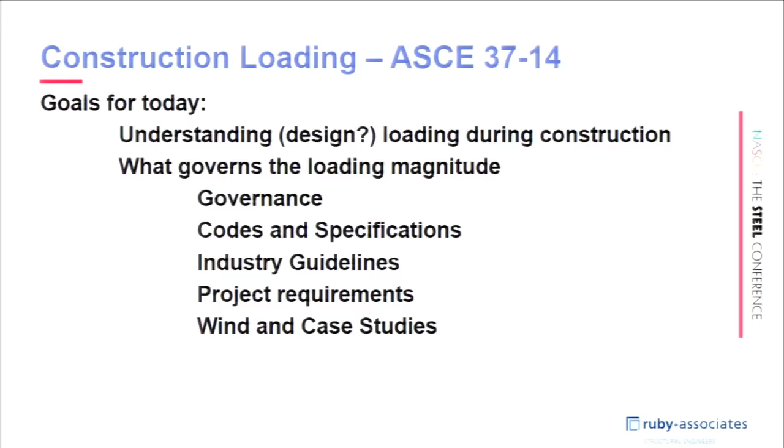We're going to look at what happens when I'm talking about all the other things. Below that document, ASCE 37-14, we have governance. What's governing that? The codes and specs, whatever's put on the drawings, industry guidelines, project requirements, and then we're going to finish up with some wind and case studies with regard to that. All of this has to do with, we've got the book that says these are the loads, but it doesn't know when to apply it, why to apply it, what are the issues.

But a little history. ASCE 37-02 indicates for some configurations, and I think everyone knows this, the loads on a structure during construction may exceed the loads on the finished structure, and hence will govern the design of the structure.

Well, I would need to tell you that in 3714, that paragraph has been deleted. And they talk about members may need to be resized and things may need to be redone, but they don't define and use the word 'will govern the design of the structure.'

I personally believe that that in fact is reasonable, because I think it's unreasonable to assume that a structural engineer, when designing the building, is going to have any clue on what's going to take place in that structure during erection. And the issue gets to that—probably 25, 30, 40% of our work is erection engineering. It's a lot of fun.

The difference being is that when you design a building and you've made your model in whatever GT Strudl or whatever it is, and you push the button and run it, and it comes out and you check and see you got blue and green and the building's fine. But when we build it, one piece at a time, each piece has to be stable, each two pieces have to be stable. So we don't run that model once.

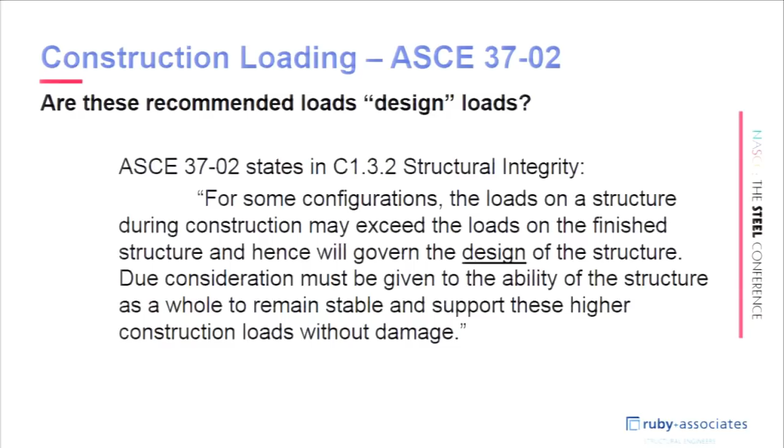So when they stated this from that, 13, let me get the budget here. Okay, did it go to sleep on me? Oh, it's not moving forward. What do I—let me see here. I just did, that came up. Try that? All right, there we are.

Thank you, Jeff. There's always reasons to have the younger generation around.

In many cases, that's that part they talk about integrity that I just gave you, which was in 2. What's in 14? Ah, yes, a little smarter: in many cases, stronger members and connections than originally designed for the permanent structure will have to be provided to support construction loads. Duh, okay?

Yes, so they tightened up between it. But I think the focus when they first did this in 2 was they really were trying to provide the fact that there was design information necessary and there was work necessary. When you do construction loads, there is additional engineering necessary. I think that was their focus.

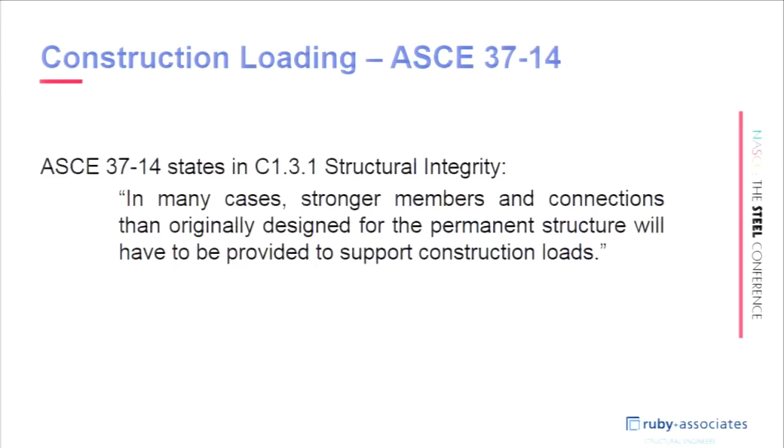But that paragraph was written, 'in the design of the structure'—boom, that's it. The attorneys probably were all over that puppy.

So what we're going to try to do is go through these things reasonably smart. You may have questions. By the way, you can interrupt any time. I have no problem with that.

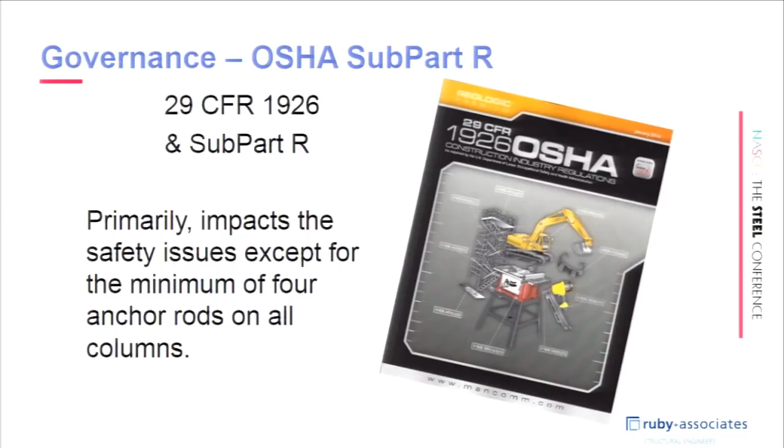We're talking about governance. We were talking about ASCE 37, but governance is about what OSHA tells ironworkers they have to do. One thing is they have to have 4 anchor bolts. Engineers give them 4 anchor bolts. I would suggest they not be in a 6 by 6 pattern, maybe a little smaller outside, but in fact they need 4 anchor bolts. So it primarily impacts that, but it's governance of the erection and how the loads are applied.

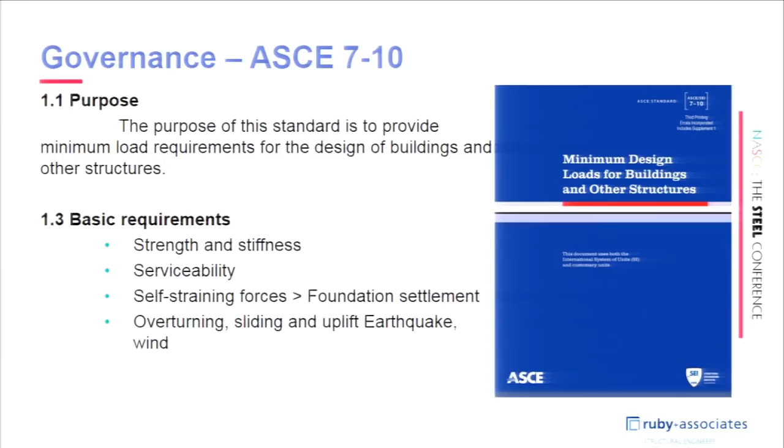We get to the purpose of ASCE 7, which is the design loads that structural engineers use in the design of the structure. You'll see this is the purpose and the basic concept. They're talking about strengths, serviceability, and strains, etc., which are very similar to what we're going to talk about in ASCE 37. The purpose is to provide minimum design requirements for construction of buildings or structures.

We've had some conversation with ASCE 7 concerning this term of design. I think it's the wrong word. I'm not sure what the word should be, but the inference is that it could possibly be code required, although it is not referenced anywhere. Somebody, the owner, could say, why do I have to pay this fabricator so much money to reinforce its structure since you designed it? But on the other hand, if we were building a bridge, that's exactly what would be done. That structure would be designed for a particular erection sequence, not recommended, but one on which it is based.

So today, when we look at a typical 10, 15, or 20-story building, that's not an issue. But when we're looking at an arena or a stadium, or the canopy over the Miami Dolphins Stadium, the erection engineer needs to know everything about that structure in order to build it. In fact, in some cases, those types of structures do have members that are reinforced.

And the question is now, what do you shore? Do you shore? Where do you preload? Do you pre-erect? There's all sorts of things that impact that temporary issue that is not covered in this design loads standard. I'm saying, well, we do it so much, I guess we get used to it.

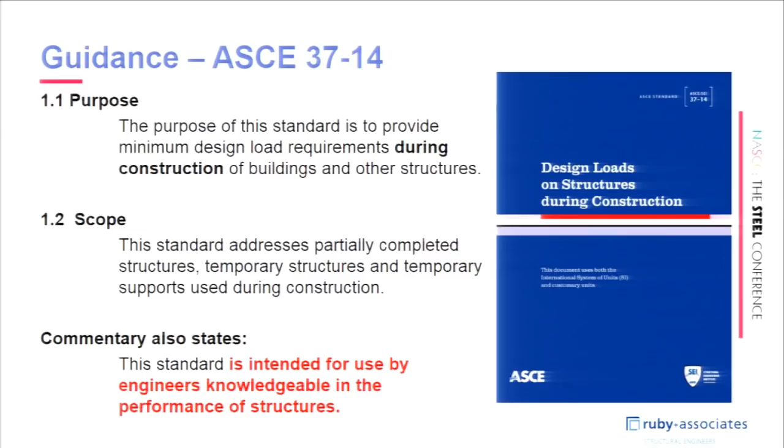Partially completed structures and temporary structures shall possess sufficient integrity under all stages of construction to remain stable and resist loads. Now, I appreciate the fact that that's here, and the reason is this document covers timber, wood, laminated wood, or concrete, precast, all those sorts of things. But if we're talking about structural steel, my feeling is the Code of Standard Practice is much clearer with regard to what's required for stability.

In the commentary, however, this is what they're telling you, intended for the engineer who actually understands structure. It says: sequencing the construction to avoid creating vulnerable, partially completed portions of the structure, and completing the permanent lateral load resisting system as the dependent portions of the structure are erected.

That would be interesting if your lateral load resistance was concrete block, and you couldn't put it in until after the structure was built. I'm not sure how you would do that.

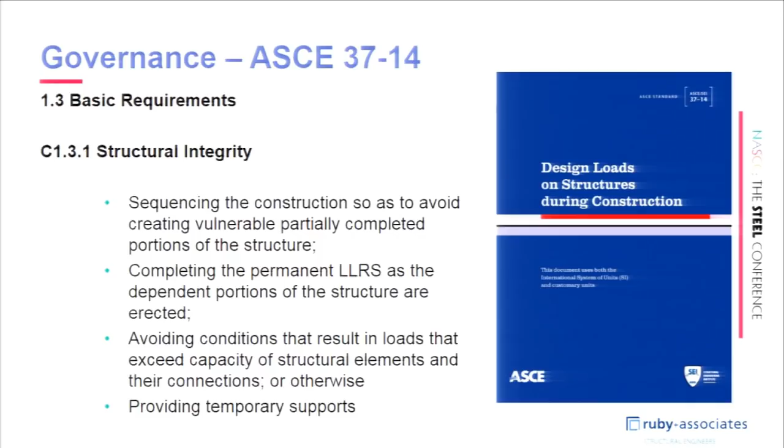Avoiding conditions that result in loads that exceed the capacity of the structural members. I don't fully understand these notes if the document is primarily about design loads, but in many cases stronger members and connections than originally designed will have to be provided to support construction loads.

The one element I have the most conversation with erectors about is that many structures experience higher wind loading on the open structure than on the completed, enclosed structure. I would change the word many to all.

We just completed the erection procedure for the canopy over Sun Life Stadium, now called Hard Rock Stadium, for the Miami Dolphins. It's a canopy supported on cables, completely sheathed top and bottom and covered all around. In the final design, and in the wind load tests, it acts somewhat like a wing. But when you're erecting it, none of that siding is there.

Wind load during erection is possible. We didn't have it, but if we'd designed for the design loads at that point in time, it was 12 times the design load the structure was designed for. We weren't quite in the hurricane zone, so we backed down on several of those elements. But to literally brace that structure for the winds that could possibly happen during construction, there was nothing to brace to that was strong enough to hold it up.

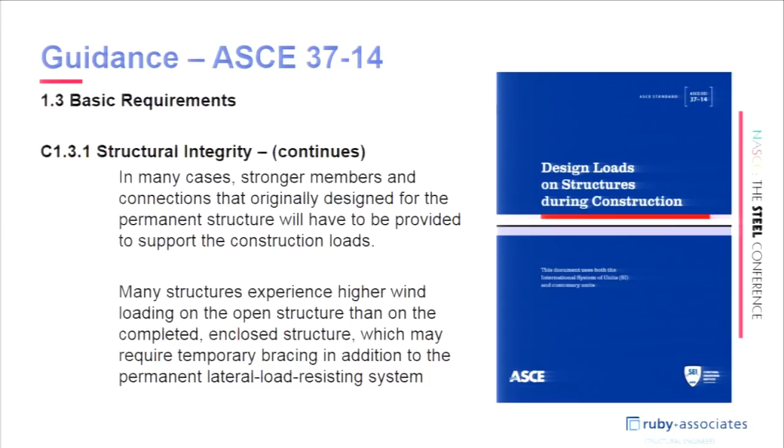So they don't necessarily always apply. On that particular project, we sat down long and hard and talked to the erector about what we were going to do. They did constant monitoring of the temperature and weather 200 to 300 miles away, watching for when the winds were coming, because we had a lot of cranes there with heavy pieces up in the air, and we didn't want anybody injured or damaged. If we had structural damage because of the winds, there was no way to hold it back.

What are the types of loads out of ASCE 37? We have dead load and live load, construction and environmental loads, lateral earth resistant pressures, forces from interaction because of the partial parts of the structure, temporary supports, and effects of loads created by methods and sequencing of construction. But not noted in there is design concept or the unique installation requirements necessary for the structure to be put in place.

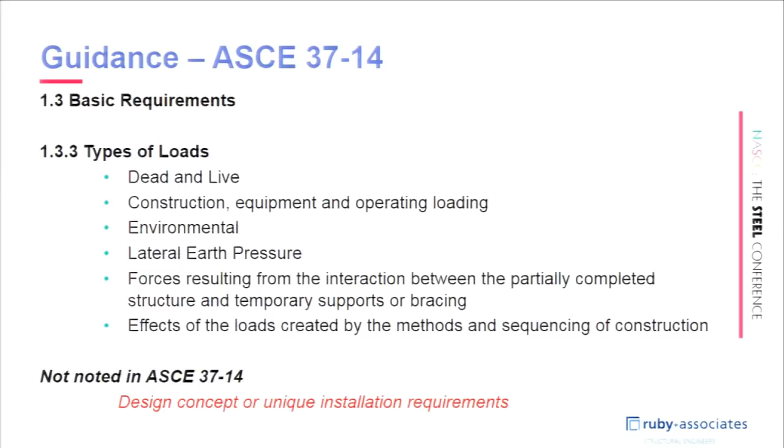Which would in fact temporarily impact your loads, as to whether you have to preload or set things to a certain elevation, one that anticipates that as the dead load is put on it, it comes down to the final elevation, as opposed to setting it at an elevation and letting deflection go where it is. There are times we've had to set a structure above and let it come down as load was put in place.

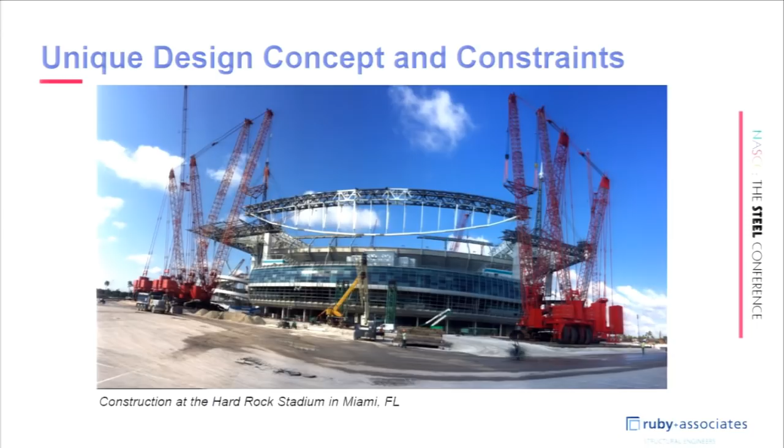So if you want to know how much time you need, when the wind is going to hit, what the loads are going to do, what's happening out there, is it tilting, is the surf up, you need to know all of that before you're prepared to do this.

Codes and specs: we've got the IBC, which references AISC 360. ANSI says maintain stability of the structure at all times. You'll understand that ASCE 37 hasn't introduced anything new when it talks about stability. We've had it there for a long time.

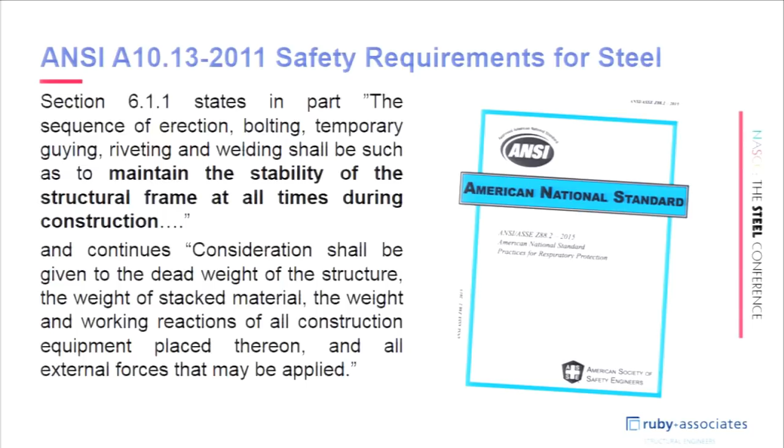Stability in the general stability specifications in the AISC 14th edition: the structural frame shall be carried up true and plumb within the limits of the code of standard practice. As erection progresses, the structure shall be secured to support dead, erection, and other loads anticipated to occur during the period of erection. This becomes an issue with regard to where those loads come from.

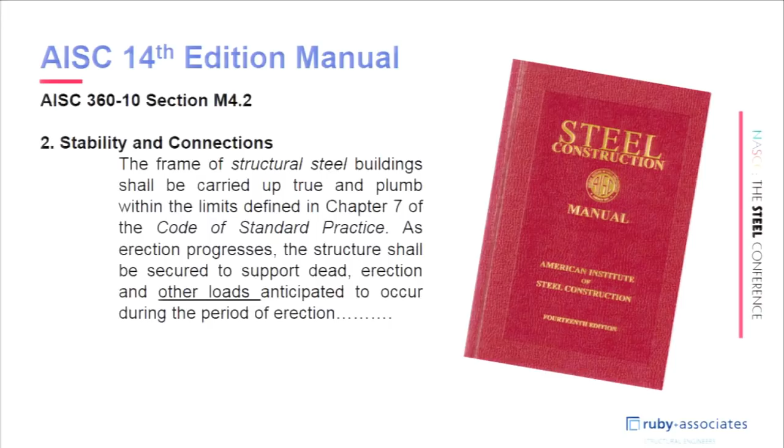When are these loads going to be applied? Are they coming from non-structural steel elements? Are they coming from precast that'll be erected later, or from wall panels that'll be put up in place? How does the erector know what that is? If in fact those sorts of loads will be coming on, they'll need to be told that.

On the Code of Standard Practice Committee, which I've just walked off after about 10 or 12 years, one thing we have in there as a note is that the structural engineer is to define the lateral load resisting system. Why? Not because we want to test whether the structural engineer knows what it is. The focus is that if I'm erecting it, what is the lateral load resisting system, so that as I erect portions or parts of it, I can physically use that as part of my bracing system.

Which means there needs to be a lateral load system with a load path that distributes to the bracing, whether it's moment frames, X bracing, precast panels, poured in place concrete, or masonry walls. Now I've had a couple of structures we've looked at that have fallen down.

The masonry walls, which were the lateral bracing system, were shown on the architectural drawings but not mentioned on the structural at all. It was a church, nice columns around the side, a nice peaked roof going up to a compression ring at the top and a tension ring down at the bottom, and they put that up, but there was nothing where the tension ring was. There were supposed to be shear walls to take the load to the ground.

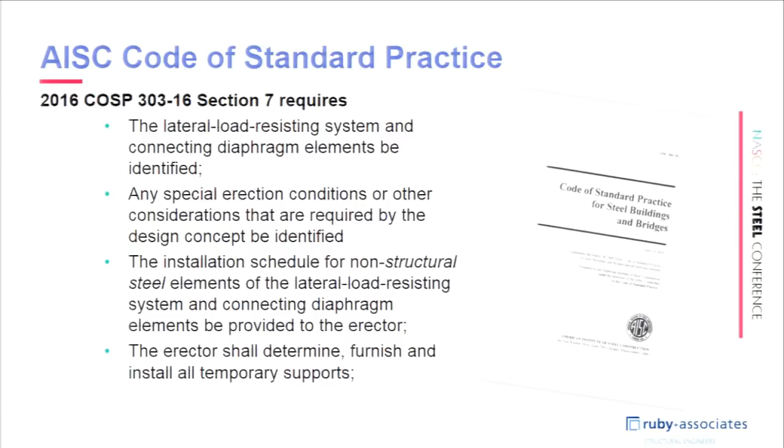The erector does not need to consider any erection condition that results from the performance of the acts of others.

In other words, when you're bidding that job, an erector chuckles because no one ever tells you this, but when you're building the building and let's say the exterior is precast, that's going to be the lateral system, and it will be the lateral system when it's completed. But the first 15 to 25% put up doesn't provide any stability to the building, and it catches a hell of a lot of wind load and becomes a sail, and you have to hold the structure up, and you didn't know anything about this when you bid the job.

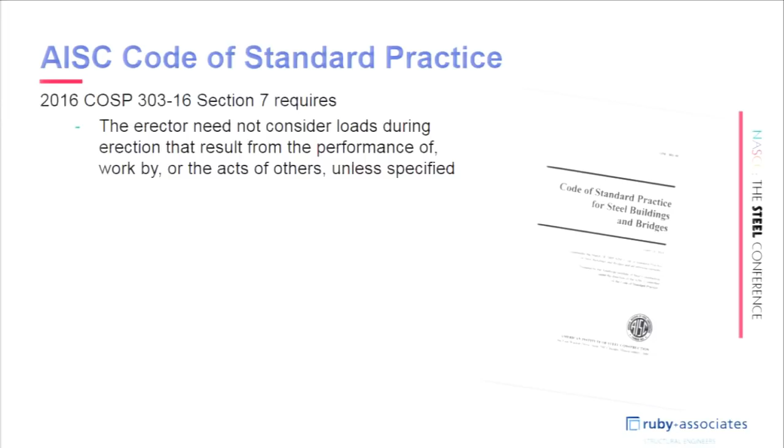So the erector need not consider unpredictable events like hurricanes, tornadoes, earthquakes, explosions, and collisions, but in fact you can be requested to have a hurricane plan. We had a hurricane plan on dolphins. We had a hurricane plan in Puerto Rico. What's the hurricane plan?

Something reasonably that you can work up, be prepared, that you can probably install in maybe a day, maybe two, but you're going to be monitoring the temperature, the winds, the weather, to make sure that that possibility is accounted for.

Temporary supports that are required during the erection of the steel frame, support caused by non-structural elements including cladding, all of that sort of thing. Those are elements that the erector needs to understand what he has to do, because it's a cost to him.

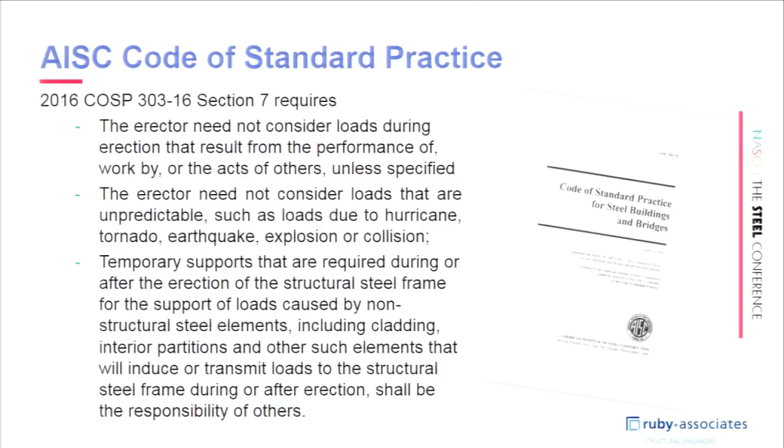And it's a load. Now, this is the AISC design examples, which are really very helpful. The original design base shear for this structure, wind, based on ASCE 7, is 168 kips. If we look at the bare structure, it's 602.

Now, what happens in that 602, that's considering the whole frame is bare. But if I put a layer of deck at the second floor and the third floor, what I do then is I start to provide dead air on those beams. So when the wind goes between the second floor deck and the third floor, it goes under those beams and misses them, flows right through. But when the metal deck is off, it catches every one of those beams.

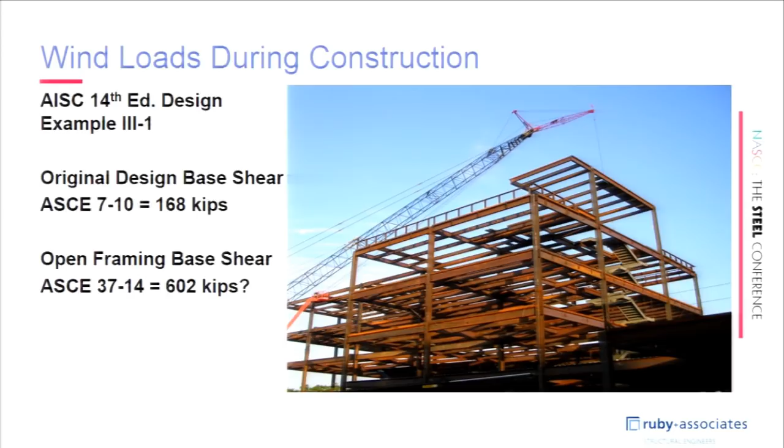And so what happens is the likelihood of us having to brace it for 602 kips. Not reasonable. But to understand it, if you take it by the letter of the way the documents are written, that's what you would have. And that's in that design example.

Structural integrity. Partially completed structures and temporary structures shall possess sufficient stability. We've talked about stability again, but I bring it up because stability is the issue of this whole document. Although it says loads, stability is really the primary concern of this document and why it's generated. They talk about the fact that it's not stable because of winds, but in fact it may not be stable because it does not have a lateral load resisting system, whether temporary or permanent.

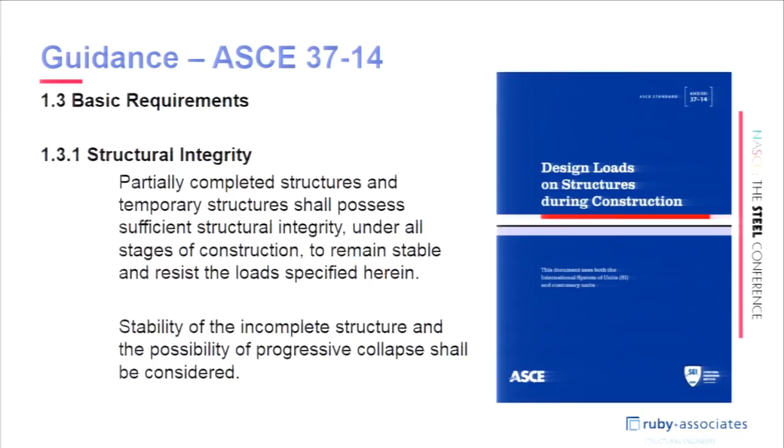Now, we talked about this on planning, etc., and I thought I would go back in the archives. This happened last century. I was with American Bridge when Hancock was built. I spent, I think, 4.5 years on this structure with SOM during the design process.

When we built this and first sat down with the general contractor and the concrete contractor, there was a meeting to decide how this was going to be scheduled, because we had four cranes on this all around the outside. It was more about how many pieces or volumes we could do, since we were shipping it in segments furnished by different fabricating plants. We didn't want the fabricating plants' trucks going to the wrong side—this plant would go north side, this plant would go south side, so it wasn't confusing to them. We sat down and worked out a procedure, and American Bridge generated the procedure for steel: how many floors a week.

And the concrete contractor looked at him and laughed. He said, 'We're going to push your ass off the building.'

Well, how many of you here are associated with ironworkers? Have you ever challenged that ironworker? Did you lose that challenge? Guess what?

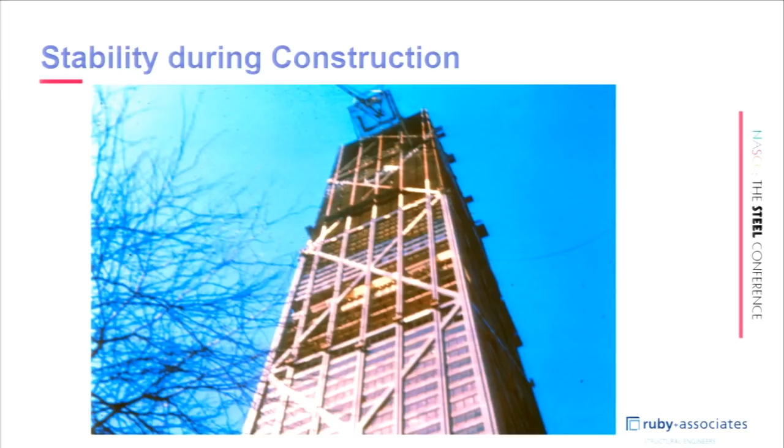AISC supplies a fair amount of guidance. We have the erection bracing on 10, the constructability of structural steel buildings on 23, and stability of steel structures in 28. Those elements are all very helpful with regard to your erection, your temporary bracing, how things would be done, and how you would apply your loads.

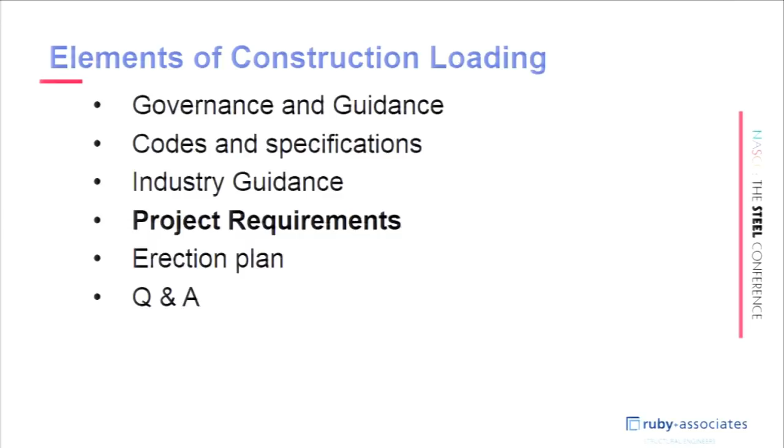Project requirements. Well, what are project requirements? Project specs, general notes, framing schemes, special and unique conditions, elevation or deflection control, shoring, jacking—all of those things in one way or another can impact the magnitude of the load, when it's a load, how it's a load, and how you're going to take it out to the final structure.

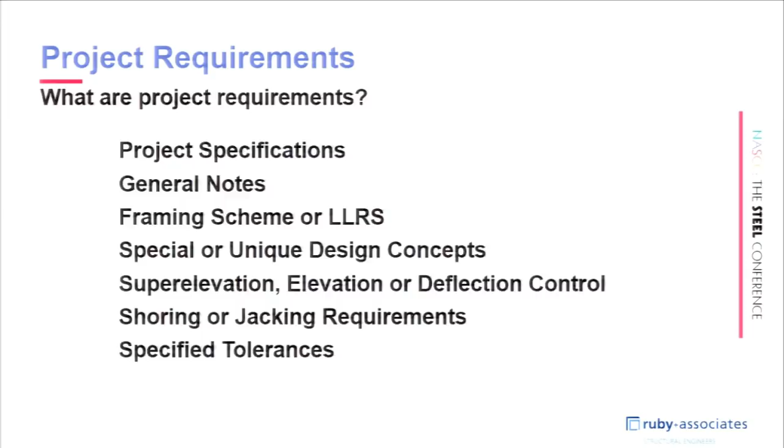One general note like this: the structure is stable only in its completed form. The lateral load system consists of metal deck diaphragms, exterior... it gives you all that information, but not enough data. Even with that information, you don't have enough data to do the project. But that's the general note, right?

The engineer feels he has done his part. He has finished the drawing. The drawings are done—that's his life, that's finished, okay? My feeling to engineers is you shouldn't feel that way. Your drawings are garbage; they'll be good for making fire later. The function here is the completed structure. That's the project. So what you have to do is provide the data to do that, whatever that is—you have to figure a way to provide that, okay?

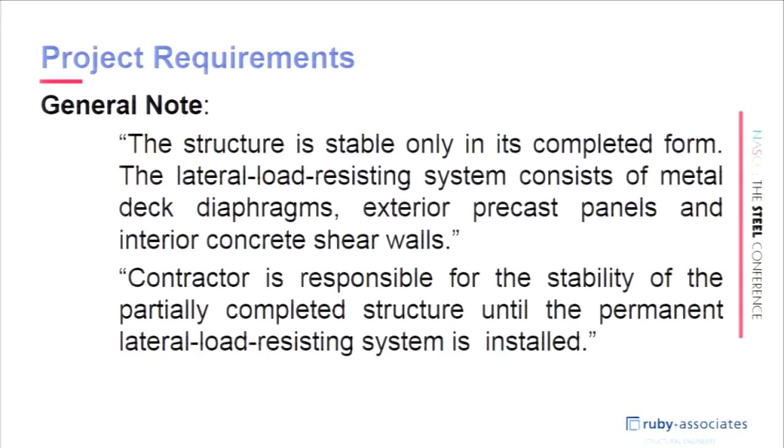The contractor is not the enemy. The fabricator and erector are not the enemy. The question is, if you tell him what he needs, the contractor is responsible for stability—he knows that. But this up here, they're talking about all this stuff: what's the schedule? When is all that stuff going to be in place? How long can I rely on it without...

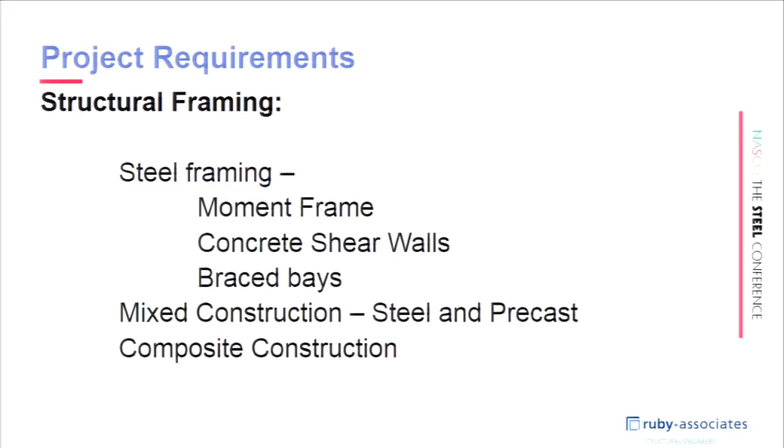Steel framing—I don't have enough room to put down all the different steel. What I'm saying is the type of steel framing there is, how it is, what it is, where it goes, where its availability is, the job site conditions, whether there's access in or out—all of that is going to impact the loading and temporary bracing schemes that you put on the structure. Shoring.

This is in Pittsburgh, the igloo. It's been torn down.

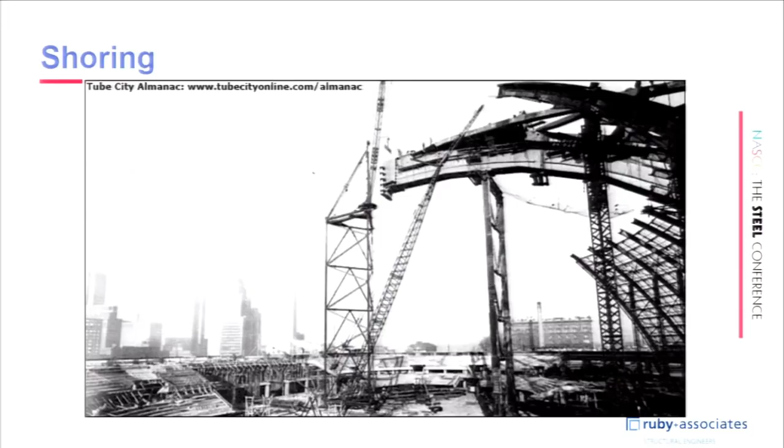That elevation out at that tip had to be maintained, but actually had to be set at an elevation so that as the structure got all the load in place and they could bring the shores down, the movable leaves would be able to be moved without binding. Significant elevation control in that process.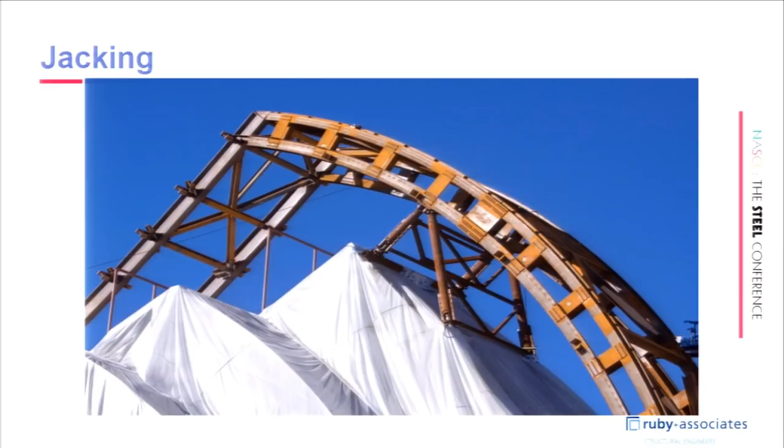Kansas City Performing Arts Center is a structure within a structure. They are outside of each other and had to be separated, but when erecting them, you didn't have stability. You had to use the inner structure to support the outer structure, and we had this jacking frame added in there to be able to get to elevations.

Super elevation. In Chicago, if you've not been there, this is what I usually demonstrate: a wrinkled piece of paper generated to look like stainless steel. But that is supported by 150, 250 tons of framing behind it, with a cantilever like 100 to 125 feet, but the backspan is like 50 to 60 feet. Now, that's not the geometry you would like to see, but that's the geometry that there is.

Now, when they did this particular beautiful thing, they had this done in CATIA, and all of the geometry was there. The engineer had indicated in the specifications that the structural steel support shall be installed and then surveyed, and that survey given to the skin guy so he can manufacture the skin to fit.

Now, the general contractor in his wisdom said, well, I have this model. Why don't I give it to the fabricator and to the skin guy, and they can both do the fabrication to this model, and we'll survey the structure at noon when everybody's at lunch so that we can tell where the structure is.

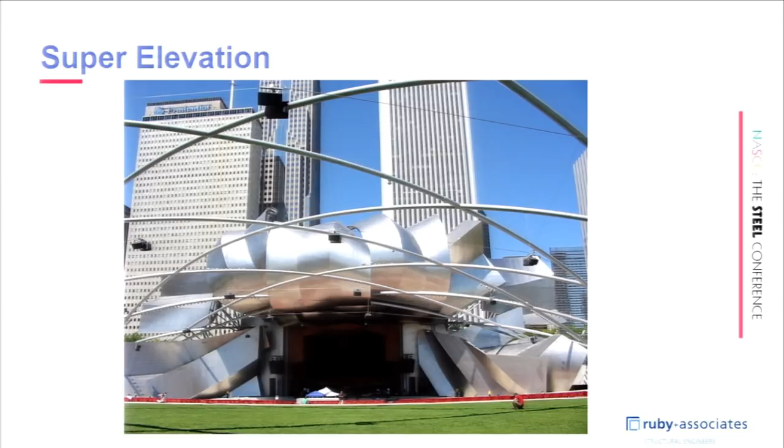This structure here, at noon in Chicago, at 85 and 90 and whatever degree temperatures, we're talking as much as we found in our modeling, 8 to 12 inches of movement of this structure, and they are supposed to be surveying it to determine where the skin's going to fit. How many here believe it fit? They managed to get it in, but it was an issue.

Specified tolerances. The AISC Code of Standard Practice has tolerances in there. They satisfy a 4, 5, 10, 15, 20-story building really well. Beyond that, manufacturing facilities, anything like cantilevered arenas, stadiums, there aren't any.

Now, as they said in one of the presentations earlier today, if a tolerance is not in the AISC code, it does not mean it's zero. It just means it has not been specified.

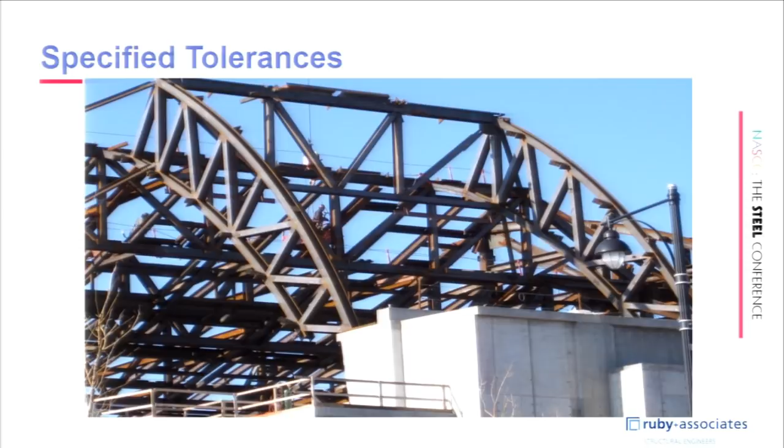But does that impact loading? Absolutely—deflection criteria. Often we'll get involved in scenarios where we have a deflection. We're going to be loading the structure, putting compression on tension members, putting tension on compression members. Some engineers get a little testy about that, a little concerned. How are we doing it?

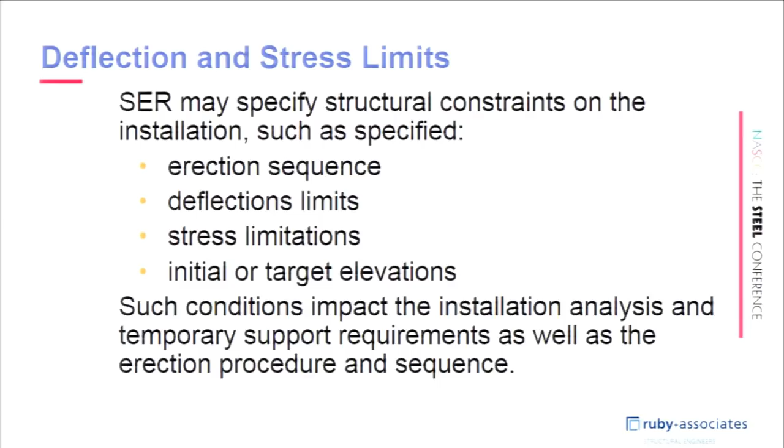The issue is that in most structures, in arenas and stadiums and those sorts of structures, during construction we'll move the dead load around. It will not be, in the end, exactly as the engineer had expected in his modeled structure. That can be an issue, so we need information with regard to erection concerns or elevation concerns, things that need to be done.

So I've talked enough now. I'm out of stories. I'm introducing Jeff, and Jeff can come up and carry the ball.

Do you have a few quick questions before we let Jeff take the ball?

Just very quickly, David, in your early slides, you were expressing concerns about responsibility and lack of clarity. Yes, I should refer everyone to Code of Standard Practice Section 1.8, very specific on the responsibility of the EOR, the structure, and the erector. But Section 1.8 of Code of Standard Practice. Thank you, Mike.

The question was on our slide concerning the base shear of about 160 some, but according to ASCE 37-14, it would be 608. What we're saying is that 608 was based on a bare structure that stayed bare the entire 5, 6, 7, 8 stories. The likelihood of that occurring is slim to none. But if you're the erection engineer, that's something you really want to talk to the erector about, because if you're working for the steel erector but the metal deck installer is somewhere else, there's an issue as to the schedule for that other work coming into place.

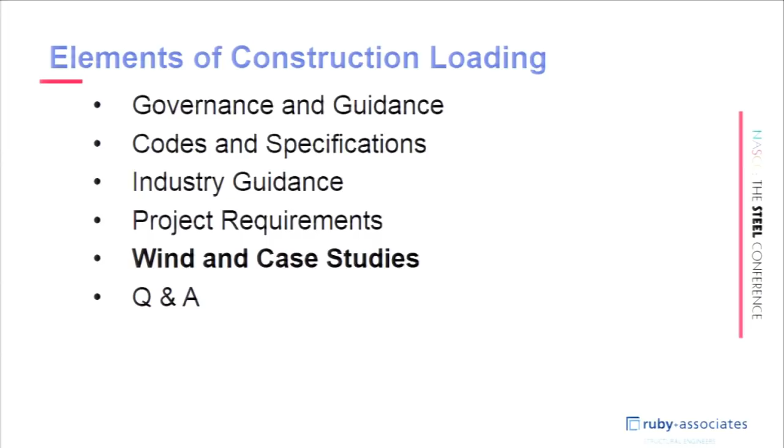Thanks, Dave. So what I'm going to do here is give a brief talk on ASCE 37, how we use it as erection engineers, talk about some of the equations regarding construction period wind development, give you some typical pressures that we find as erection engineers, and then some case studies of a few different design elements.

So first, what does ASCE 37 tell us? It tells us if you want to develop wind, go back to ASCE 7. Here we've got our force equation: force is equal to pressure times area. We've got a couple other extra variables—the gust effect factor is typically 0.85 when we're doing erection engineering on structural steel jobs.

Our force coefficient, which is a function of the area of steel to the gross whole—that factor can be anywhere from 1.6 to 2, but more often than not, as erection engineers in our office, we find it's 1.8. G and C sub F typically stay at 0.85 and 1.8, then you have the area of steel—as Dave mentioned, that's all projected surfaces of structural steel, normal to the wind, and can be quite substantial.

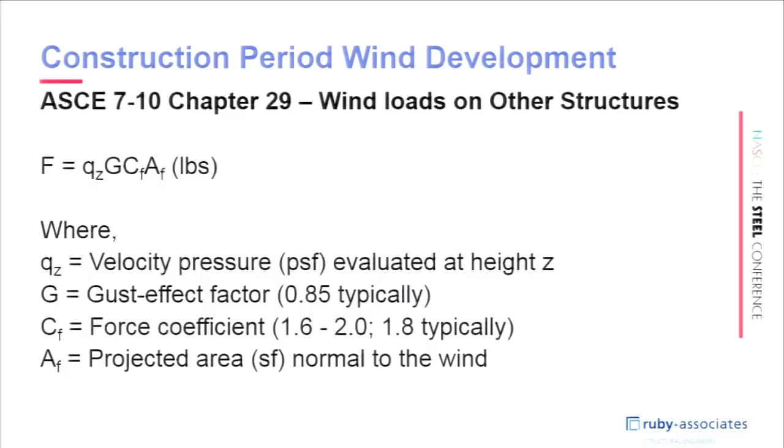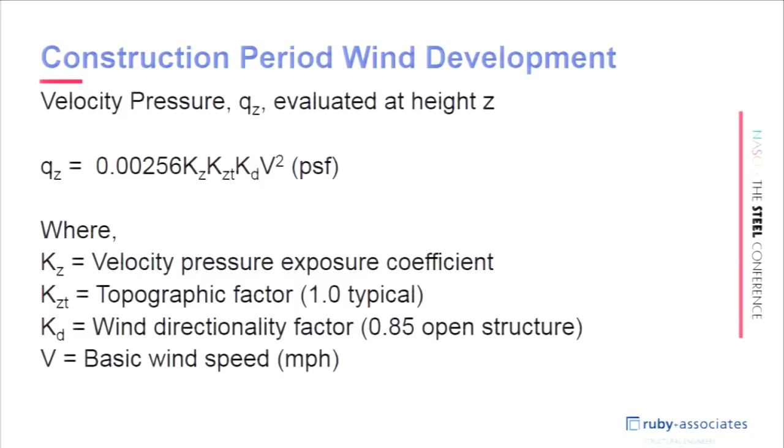As we investigate the pressure a bit more, we have this equation: 0.00256, a couple different K factors, and then V, the base velocity of wind. The big takeaway is that value is squared. If we're talking about a 10-mile-an-hour wind on a job site versus a 100-mile-an-hour wind, that's not 10 times the amount of wind—that's 100 times the amount. So that pressure exponentially gets quite large.

So again, with ASCE 7, here's the wind maps. What ASCE 37 tells us is during erection, we can use the risk category 2 maps. These maps had changed in 2010. They're now given as LRFD, which means they're load factored.

So if everybody that's been around for more than the last 6-7 years used the old maps, these were 90-mile-an-hour wind zones, the primary focus of the country. And then as you get out of the coast, those wind speeds go up and up. So that 115 is an LRFD load.

What we do in order to communicate with our clients is we convert that back to ASD. It's on our drawings, we're trying to communicate with real world wind speeds. The anemometer at the top of the crane boom does not measure with a load factor to get you to LRFD. It's talking real world wind speeds.

So we convert that. The last thing we want to take away from this slide, as Dave talked about, is ASCE 37 hurricane provisions. There's about a 4-month period where we're outside of hurricane season along the coast. With ASCE 37, we're allowed to take that base velocity and use the 115. So again, convert it back to ASD, but for that 4-month period, erection engineers, we can use that lower 115 miles an hour as our baseline.

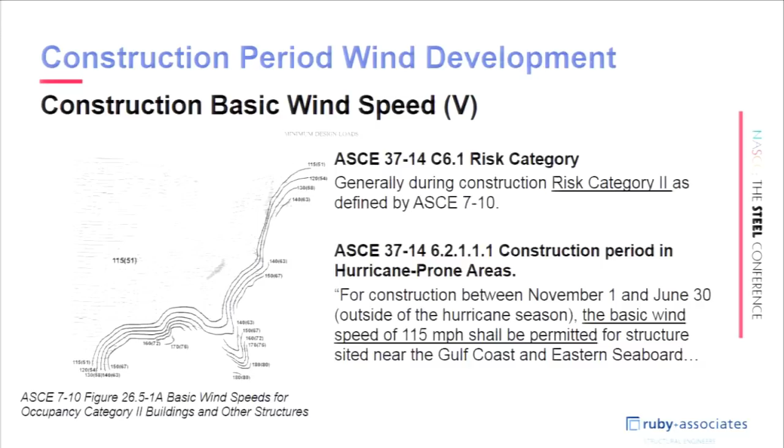For the 8 months that we are in hurricane season, you have to have that contingency plan. Taking Miami for instance, which is LRFD again 180 miles an hour, that pressure could be 200 times the amount of temporary bracing that you're going to be required when you're making that plan. So just as a heads up, it's better to build when you're off season.

Dave talked about really what did ASCE 37, what are its takeaways, where did it all come from, where's its basis. The biggest thing that we as erection engineers use ASCE 37 for is this handy little reduction factor. What this reduction factor is talking about is based on the duration of the project, you don't have the same probability that those design winds will be on your structure because of the duration of the project. It's just a function of probability of the wind hitting.

So in our office, we find that most structural jobs that we do, I'd say 99 out of 100, probably 100 out of 100, fall in the 6-week to 1 year range. So ASCE 37 has given us a break of 0.8 on that base wind.

So at the bottom of the screen here, what we have is just talking about the base velocity. So we take the new map, 115, which is LRFD strength. We convert it by dividing by 1.26, which is a value that ASCE 37 gives us. And now we're back to, it's 92 based on that factor, but we're really back to the old 90-mile-an-hour wind maps. So now during a construction period, for temporary wind loads, we multiply that by that 0.8 reduction factor they gave us, and now we're back to 73.

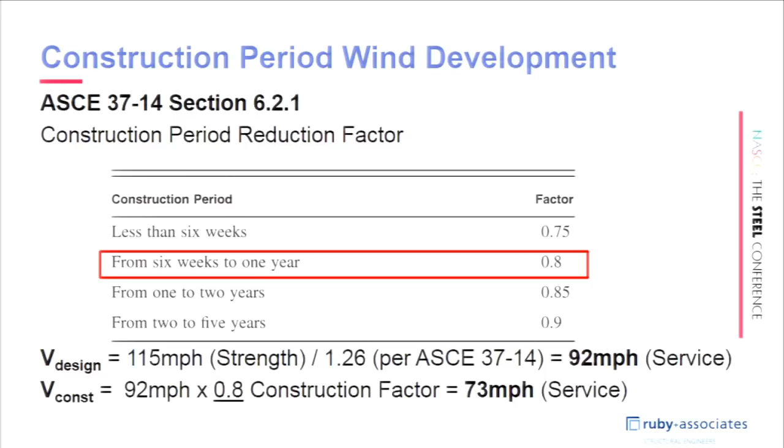So the reason I did this is I wanted to say, as erection engineers, when we're doing work for an erector, generally we're bracing up that structure for 73 miles an hour on most projects, and then providing some factor of safety on top of that.

So what I thought I would do is put this little table together here, and what we're looking at is a couple different heights, so exposure B or exposure C. This is most projects that we run across are in those two exposure categories. But the big takeaway here is seeing just how quickly that pressure goes up.

So what I've done is I've used the equations that we previously ran through, and then just plugged in 6 different velocities, and developed these pressures. You can see just how exponentially quick that pressure builds once you get higher and higher wind speed. So if you have a 15 mile an hour wind out on your job site, that's a relatively windy day.

You might lose your hard hat. At 25 miles an hour you're starting to think about shutting down the crane. At 10 or 15 miles an hour, you're at 1 PSF - that's nothing on your structure. At 30 miles an hour, you're shutting down the crane, and you're still under 5 PSF on your partially erected structure.

So as I mentioned, ASCE 37, we're designing and bracing, analyzing to the 73 miles an hour. Where if we're talking about LRFD or ASD, the full design for the lateral load resisting system of the completed structure, that's up there at 90. So taking a look at 90, we're designing to 20 to 35 PSF - it's a pretty sizable load.

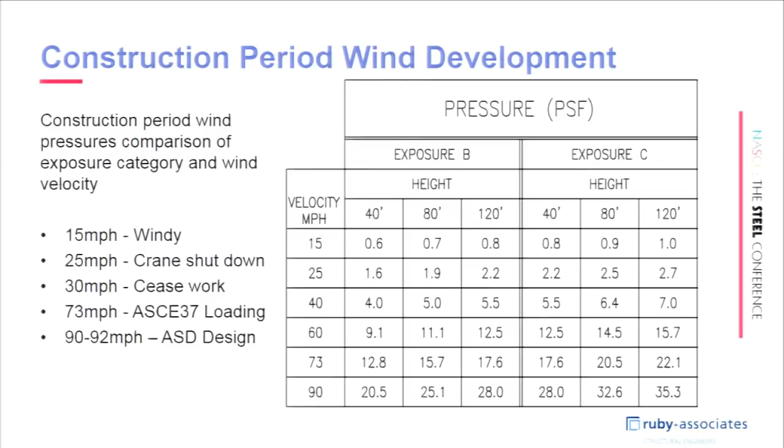So as I was preparing for this, I thought it would be nice to show everybody, just give them an idea of what velocity equates to in pressure. I mean, the table was nice, but you couldn't put your hands around it, you couldn't feel it.

So two weeks ago, across most of the Midwest, we had this nice windstorm that kind of provided an example for me. What you see in the photo here is the outage maps from DTE, our energy provider, and those are all the homes that lost power that day.

It's 60 to 65 mile an hour winds. I've been in the Detroit area now for 20 years, and that's as high as I've seen it. We lost power to nearly 800,000 to 1 million homes, and we had a power outage for roughly a week for a lot of homes - I think we had one guy in our office who just got his power back last Saturday. So it was pretty devastating, but it gave us something to look at.

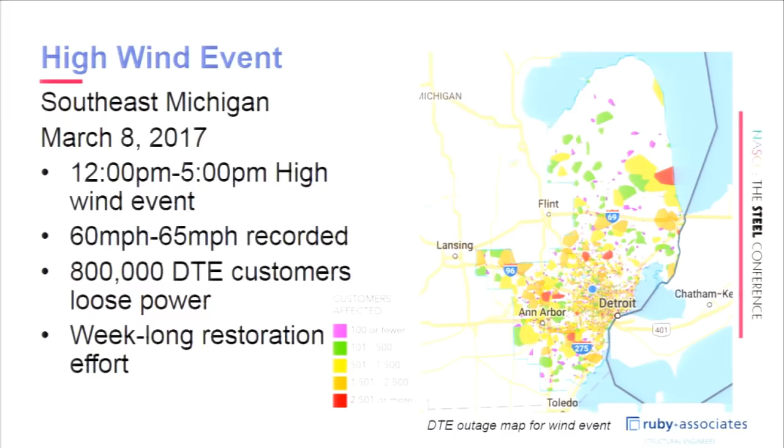So I take that 60, 65 miles an hour, run it back through our same equations, and equate it to a project. I thought about it - all the damage that was occurring was really from trees knocking down power lines, falling on this poor guy's car, tearing off awnings and what have you. But the pressure, whether you're category B or category C, you're still in this 9 to 13 PSF. That's half of what we're designing structures for on the full design. And if we convert that, running it for an erection engineering job off that 73 mile an hour figure, that's about 65% of the design load - really what we're designing or analyzing structures for temporarily.

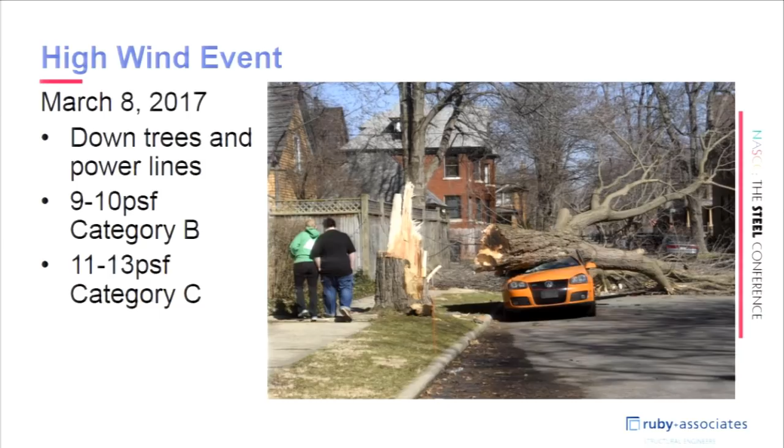So now we've got just a couple of case studies I wanted to show you, just to show how wind can impact some jobs. First we start with this freestanding column. The column's 45 feet tall. We put our wind pressure on it in the 10 to 14 PSF range, exposure category B, and you can see we generate an overturning moment at the base of 15 kip feet.

That's not a lot. But when you look to the bottom right of the screen here, you see the base plate with this 6x6 base plate pattern - it's a 6x6 anchor bolt pattern, sorry - and it's a 22-inch by 22-inch base plate. So it looked a little weird. The anchors are 3/4 inch diameter, A36, and now we're applying the 73 mile an hour wind pressures of 10 to 14 PSF.

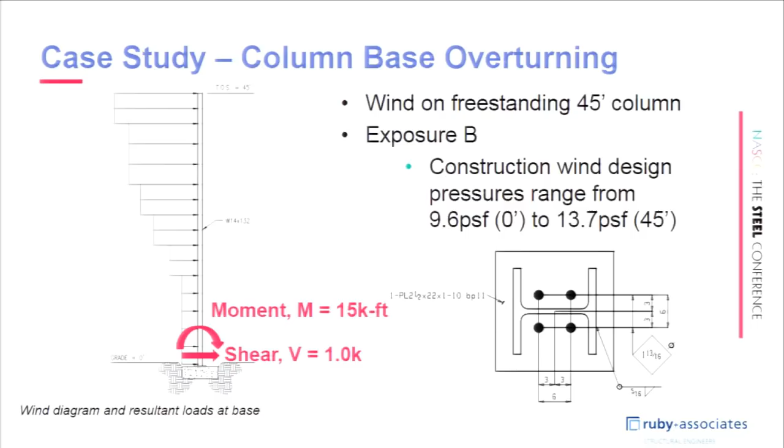So the one thing to note here is the erector wasn't using shims - we're on leveling nuts on that 6x6 pattern with the A36 threaded rod. Needless to say, the anchors don't work for the ASCE 37 wind loads. We're overstressed - we haven't quite failed, but we're getting there.

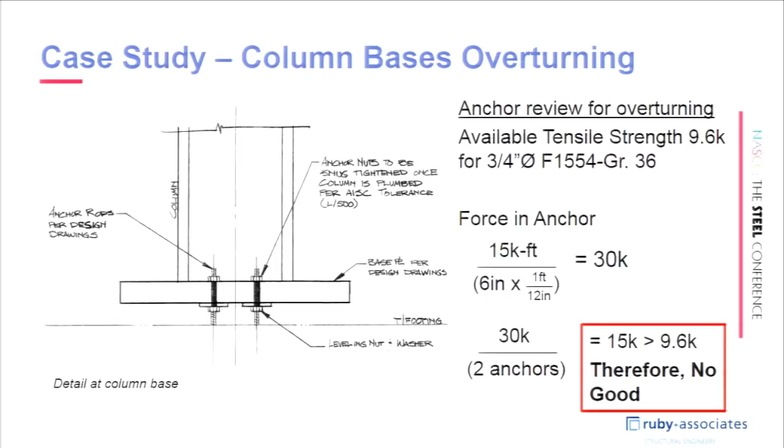Well, this is what it looked like when I got to the job site. That's the column - you can see the great big base plate pattern. Fortunately, or maybe unfortunately depending on how you want to look at it, this did not fall from wind. This column fell due to an incidental load during erection.

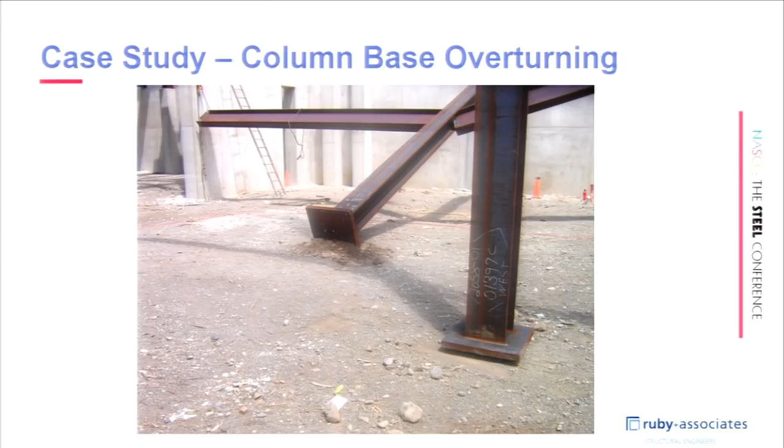So what happened was, during fit up, they were trying to tie in at the top of the column and just trying to force fit a girder into the column. Again, sitting on those leveling nuts, there was hardly any resistance. So what you see there is 3 of the 4 anchors are still at least on the base plate - the other one shot off to God knows where. But you have this tensile rupture.

And when I arrived on the job site, the first thing I asked the guy was, where's the shim packs? You have this 24-inch base plate - you got all these opportunities to throw some shim packs around. Where are they? We didn't think we needed them.

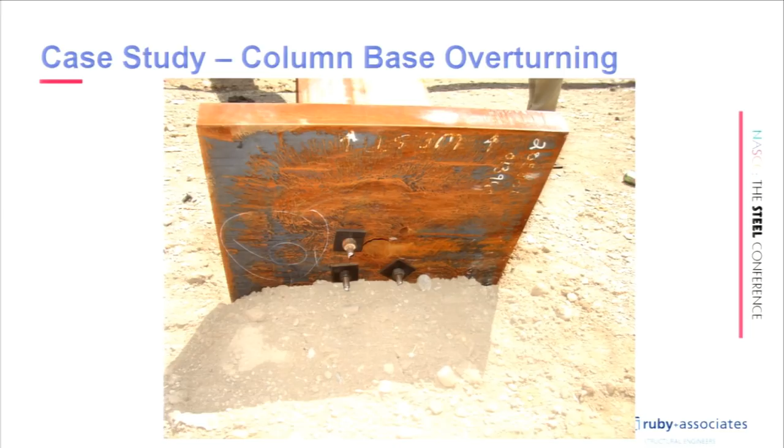So I thought I would just, for the purpose of this presentation, kind of back solve on this 45-foot column. At the time, we were brought in and gave them some erection engineering services to tell them where to put some shims and where to brace, etc. But for this presentation, I thought, well, let's figure out what that 500-pound load at the top of a 45-foot column, what does it do?

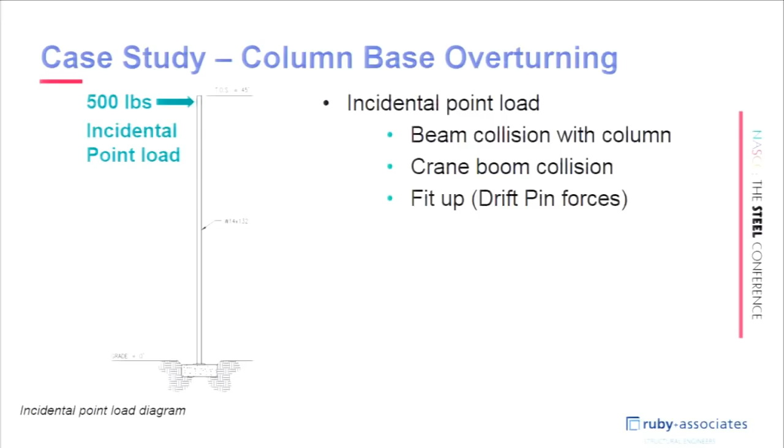So it's an incidental load. It could be a beam off the crane colliding with the column. It could be the boom rubbing up alongside the column, or it could be, and this is probably the biggest one, is just fit up. So if you had a braced frame and you were trying to fit the girder to the adjacent column from a braced frame, the braced frame's not going to go anywhere. But if for whatever reason it's long or tight and you start putting in the drift pin and the iron worker gets out his beater and he starts getting after it, 500 pounds you can get there in a real big hurry. So I think you all know where this is going.

Just 500 pounds would generate a moment of 22 kip feet. These anchors give way at 19, so no bueno.

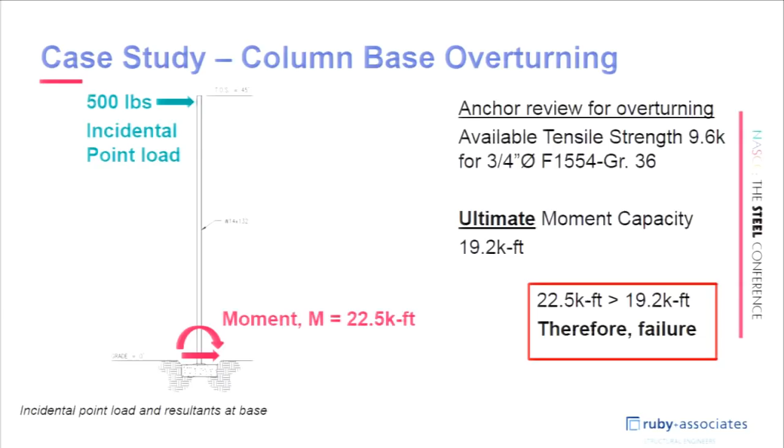Our lessons learned here, for the erection, or for the engineers out in the audience, push out those anchors whenever you can. Take them outside of the profile of the column. It affords a lot of insurances during erection. And if you need a 24-inch by 24-inch base plate for some reason, question yourself as to why you have a 6x6 anchor bolt pattern. If it doesn't look right, it's probably not.

Erectors, leveling nuts are great, but if you think about what they're doing, you can't be putting a dead load on them. You have a nut underneath the base plate that's now taking dead load, so it's as good as those threads that are engaging that anchor bolt. On top of that, you enter any amount of overturning moment into it, it's a recipe for disaster.

So add shims. Very cheap insurance policy. Look out for forecasted winds. If you have a good plan, you shouldn't have to worry about it, but keep an eye out on it. And then just be aware of those incidental forces. If you see guys beating bolts or beating drift pins in place, take a look and make sure you got some shims down there for some way to resolve that moment.

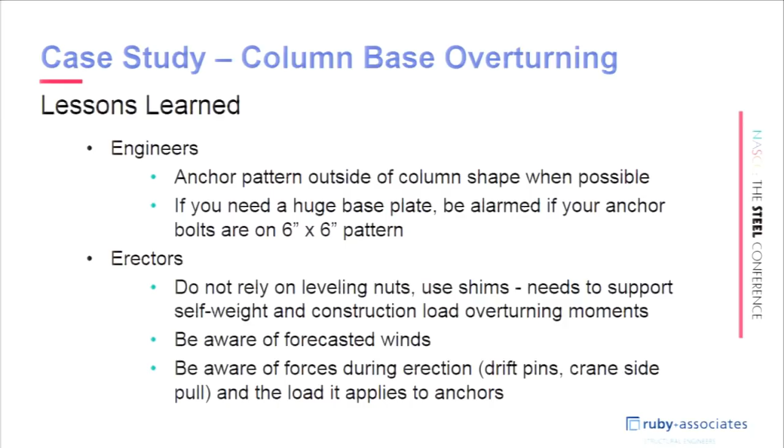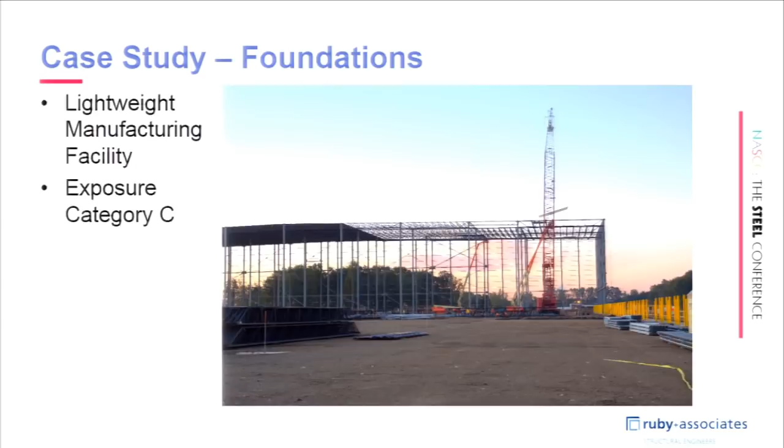So our next case study here, this is a very, very lightweight manufacturing facility. Exposure category C, which means it had some increases in wind. It was probably arguable. It could have been B, but that's what the general note said, C. This building is roughly 80 feet tall. There are no intermediate floors, wide open spaces, 50 by 50 bay. And we were asked to provide a stability plan for it.

So we started analyzing it. 80 feet, you're probably talking 20 PSF on the structure. So, through typical methods, we're putting in wire rope bracing where we can. And then we noticed this 6x6 foundation. I said to the engineer, my engineer was running the numbers. So this column is 80 feet tall. It's sitting on a 6x6 foundation. It's 18 inches thick. That foundation weighs 8,000 pounds. My first thought was, we're going to pull these foundations right out of the ground.

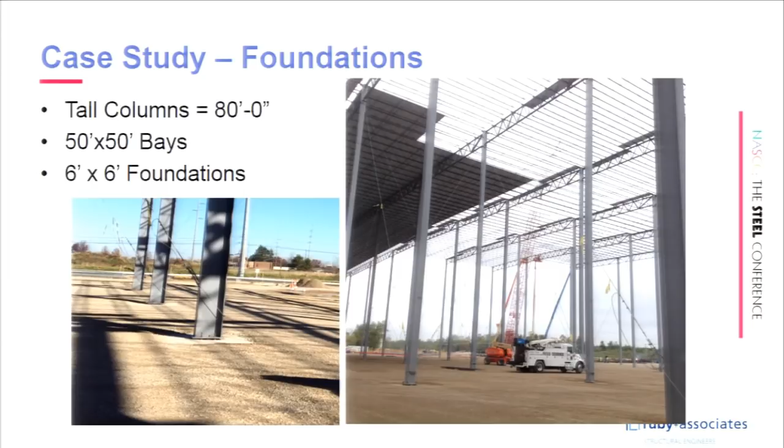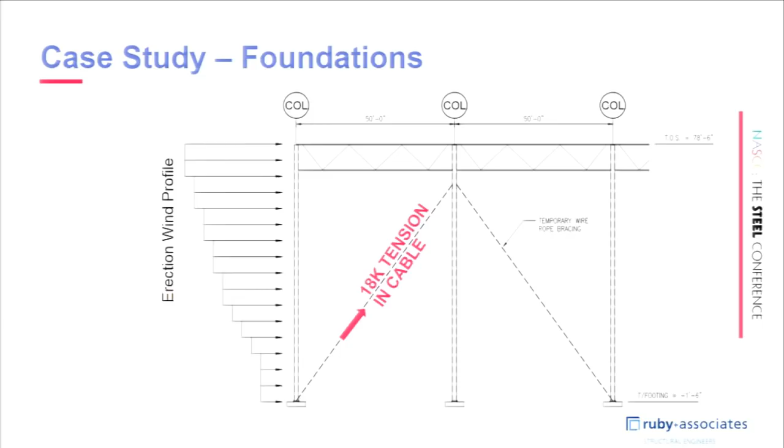Well, we got into it. We did what we could. We put in our, came up with a bracing plan, found we had about 18 kips of tension force in wire rope bracing. Like I said, about 20 PSF at that 80-foot roof. So that brace has about a 12.5 kip horizontal component. We didn't pull it out of the ground, but it would slide if it were subjected to ASCE 37 full wind loads. The only thing that's there to resist it is the sliding friction resistance and a little bit of passive earth pressure on that 18-inch face. So as you see there in the numbers, we had, from our brace, we figured 12.5 kips. We had determined we had an ultimate lateral resistance of around 9 kips. So back solving that for, okay, what are we good for? Because we're still just going to use these foundations to resist this structure and keep it stable.

We found that we had about a factor of safety of 1 at 60 miles per hour. We talked to our client about that, said hey, if there's forecast winds greater than that, let's talk to each other and see what we can do, because it's going to be interesting. We got lucky.

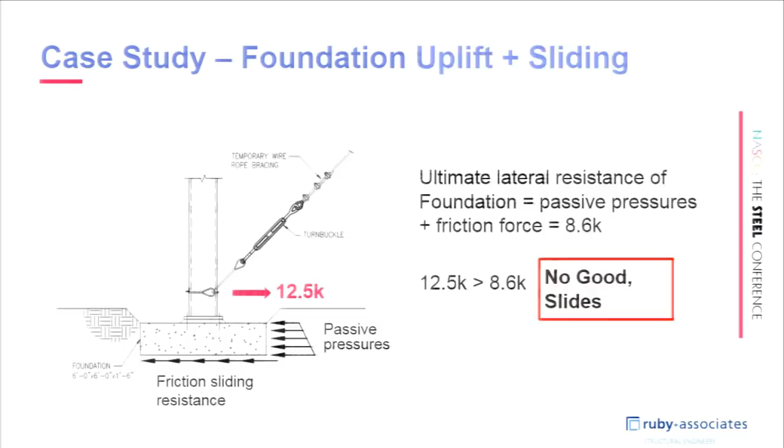Lessons learned here: make sure these extra tall columns with no intermediate floors have a decent foundation. If you just draw that to scale, 80 feet tall, 6 foot wide base, it doesn't even look right. Again, if it doesn't look right, it's probably not. Sure, it works great in the final structure, but keep your erector in mind, keep erection in mind.

This structure had a great big roof diaphragm that took loads to external braced frames, but in the meantime, there's a temporary load path, temporary stability to be thinking about that the erector has to contend with.

And erectors, look at those foundations when you're bidding the job. Understand that you have the ultimate responsibility in keeping this thing stable. And if you're going to be tying off to the bases of columns, understand what the base of that column is sitting on as well.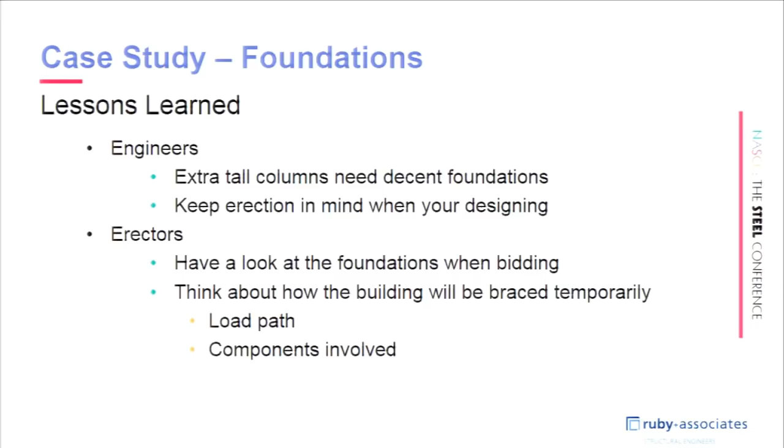So our last case study here, this one's been around in my repertoire for quite a while. Some of the guys in the audience, I'm sure, recognize it. He's shaking his head.

Then we started looking at the lateral load resisting system. This system has a roof diaphragm. Like I said, the joists are 40-foot joists, but to deliver that diaphragm load down to the vertical braced frame, strangely enough, it relied on the columns to cantilever from the bottom chord up to the top chord.

So you kind of had this tabletop of diaphragm relying on the bending resistance of God knows how many columns from the bottom chord all the way up. It had a real light bottom chord bracing system, horizontal, the bottom chord, and like I said, the vertical braced frames.

So we started looking at the challenges throughout the drawings. I said, all right, well, they've set a couple trusses. It's 100 feet long, but the truss has an 8-inch wide top flange. This was a double negative. Number one, the 8-inch top flange, when you go to set the column, is now a 100-foot unbraced length.

The compression load generated in just setting the column is too great for that chord to handle. So now you have to set additional members back to cut down the unbraced length in order to cut free from the crane.

The second problem with the 8-inch top flange is when you start talking ASCE 37 and put your 73 mile an hour winds, so at this height maybe we're talking 20 PSF, we have no real way to bring it back to the column lines. The issue here is the weak axis bending of the top chord just isn't there. This building has no sway frames, so we get no help from the bottom chord, and we still need to figure out how we're going to get it to that braced frame.

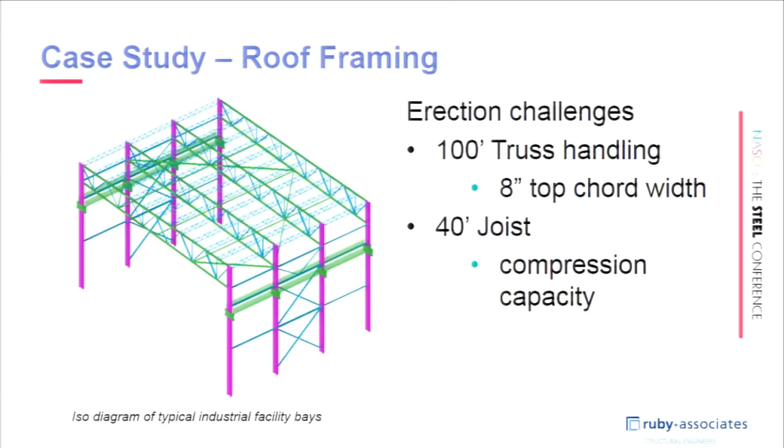Well, one other thing to note on this drawing, these 40-foot joists have very limited compression capacity, and if you look at the column line at the top chord elevation, that's also a 40-foot joist. So from an erection standpoint, we're trying to bring load out to the braced frame, but at the top of this braced frame we have a 40-foot joist that's good for probably 600 to 1,000 pounds of compression. So lots of challenges.

What we ended up doing, to provide stability to the top chord, we added temporary sway frames to work off of the bottom chord. And then we ended up adding a horizontal bracing system. This is all done in wire rope.

And we had to put that in there temporarily until there was enough deck in place that we could cut it free and get that diaphragm action.

Going back to that joist I was talking about, the 40-foot joist on the column line, we probably added that every 5 to 6 bays to deal with the wind loads. But when we bring it out to the column line, the biggest problem is we still don't have a compression member out there that can take the brace force. So we had to brace the columns on the column line, not so much because there's a braced frame there.

So you're thinking, why temporarily brace at a braced frame? Those wire ropes are in place to put that whole system into tension, because there was no way to get the horizontal load to the braced frame, other than keeping the load out of that 40-foot joist.

The job went fine after that. Got those first couple bays up, and once we got the plan rolling, the client made it through the whole mile, but not without these challenges.

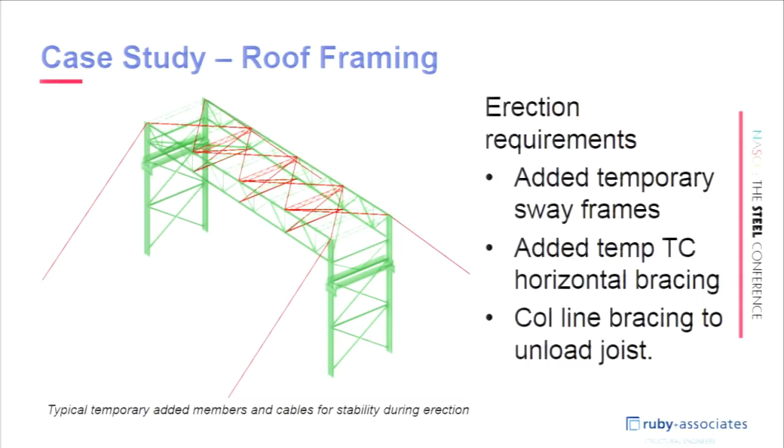I'm sure this amount of false work, the wire ropes we're talking about, temporary sway frames, adding temporary horizontal braces to deliver load, none of this is going to be in their number for sure. So the big takeaways on this one, as an engineer...

Think about that truss size, that truss top chord size. If it's a wide flange, try to turn it so the web's horizontal. We get significantly more bending capacity, significantly more axial strength when that truss top chord as a wide flange is turned horizontally. And even though everybody's looking for these light structures, or at least it was en vogue, it doesn't necessarily mean least cost.

So if you think about the labor, erection, the time, everything else that's going into it to make this ultralight structure stable temporarily.

And then on those column lines, think about the erector, think about erection. When you have a joist on the column line, upsize that. Get a wide flange in there, something that can take some sort of compression load. And think about truss stability.

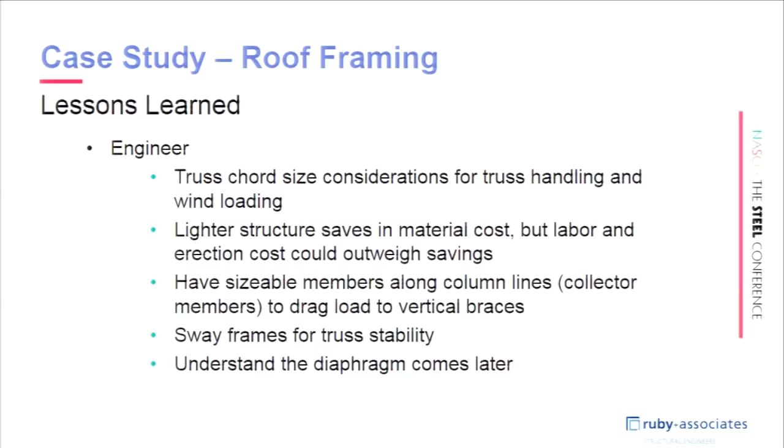Understand that when erectors are doing these types of jobs, those roof diaphragms might not be in place for 3, 4, 5 weeks, and that's just for a given bay. So as a job is sequenced, you might not be engaging braced frames for quite a while. There's a lot to consider there. And the big one is, these lightweight buildings aren't necessarily least cost.

As the erector, this probably is not a surprise, but don't be basing your bid off of tonnage, especially that lightweight one. So if your number is based on that tonnage, you're going to take it on the chin.

Look for that lateral load resisting system itself. Per the Code of Standard Practice, Dave touched on it. It should be given in the general notes. It's normally not, at least in the drawings that I've seen, and we've all probably seen. But if it's not, you can ask the question. Just ask it as an RFI. Fire it back at the EOR. What's the lateral load resisting system? Both directions. We're just looking for it. Nice to know.

Watch out for this, it's kind of like the tiny little foundation. Just keep your eye out on joists on column lines, small foundations, just those little things, because as erectors, you're needed to provide that temporary path, and you're responsible for stability throughout. So look for the weak links in the chain if you can.

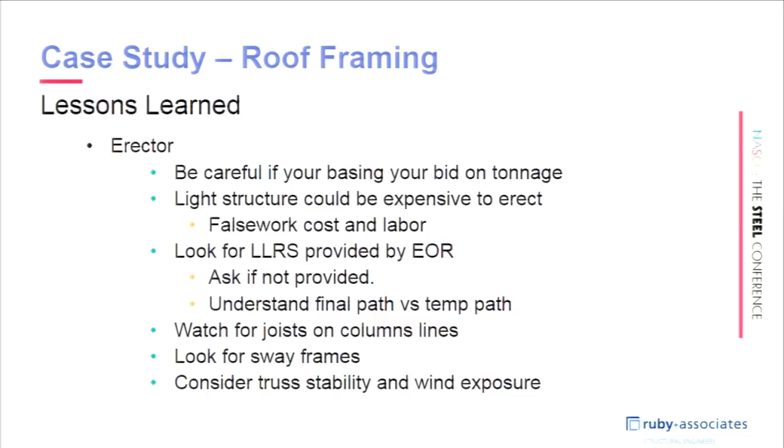And with that, I think Dave wanted to talk about a few things on... Sure, here comes Dave again. Thank you.

Before we go to the conclusions, do you have a few questions?

Yes. I know it's not a hard and fast calculation, but what's the rule of thumb you use when, if you're an erector, you're looking at a job, looking at that truss top chord, the width, and the length. I know there's a rule of thumb you use where you've got to take a harder look at it to determine if it's going to need some temporary support while you're erecting it. Yeah, so Dave taught me, or somebody repeat the question. Okay.

So the question was, as a rule of thumb, when will an erector have some heartache with trusses, having to cut them free? This is kind of an unbraced length question. What Dave taught me a long time ago, probably from American Bridge, is you take the span in inches, so it's L over B, your span in inches over the width of your flange. What we said is under 80, if that value is under 80, you're probably okay to cut free the crane. If it's north of 80, so 80 to 100, you're going to want to look at it. And if it's greater than 100, give us a call.